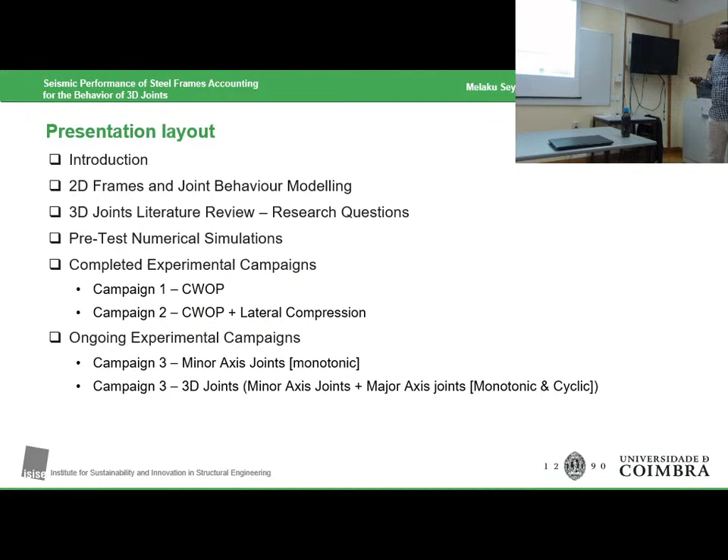My presentation has the following layout. I'll first give some introduction, followed by the basic work done in two-dimensional frames and a literature review that was done to provide the research questions, which will be presented later. The pretest numerical simulations will be shortly presented afterwards, and then I'll present the results of the completed experimental tests and show you what is being done currently in the last few slides.

The scope and objective of this work is mainly, the end goal, to study the major and minor joint interactions in three-dimensional joints where beams frame into a column from both the major axis and the minor axis direction, and propose an appropriate modeling technique for structural analysis and assess the joint model's effects in design and seismic performance. To do this, experimental tests will be carried out, a modeling tool will be developed.

Then analysis and design routines will be developed, and the performance of the frames will be assessed using nonlinear analysis. The scope of this work is, for now, applicable to the type of joint typologies we studied, but probably scalable, and this is to be determined.

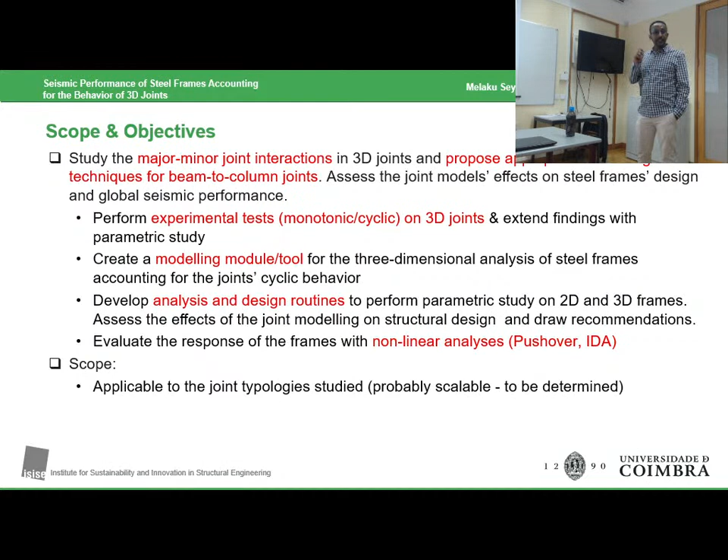This is the research structure and the tasks. The ones in red are completed tasks. The ongoing ones are in purple or pink, and the white ones are the ones yet to be completed.

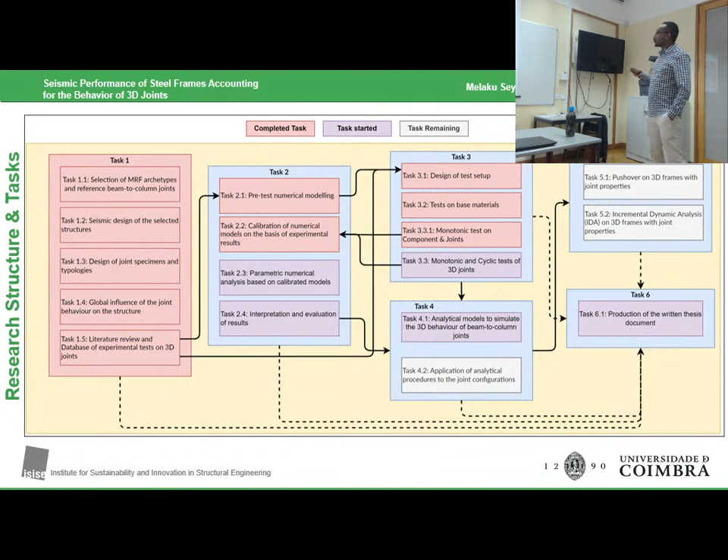It starts with task 1, where we work on 2D and then the literature review on three-dimensional joints. Task 2 is the numerical modeling part. Task 3 is the experimental part. Task 4 is the analytical mechanical development part. Task 5 is the nonlinear performance assessment. Task 6 is writing the thesis itself.

To give an overall idea for people here who are not working in the area of joints, the joint behavior can be predicted through several ways, using analytical, empirical, experimental, mechanical, numerical, and nowadays informational models. The joint can be represented in structural analysis using different methods of different degrees of accuracy, such as a linear model, bilinear model, multilinear model, or a complete nonlinear model.

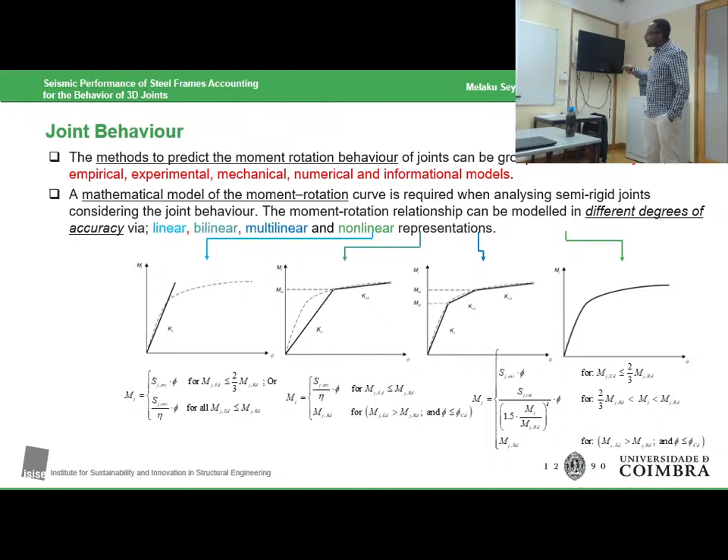Apart from the behavior, the way we include the joint in our model is also important. The most common is this one, where we use a linear center line model, where the node dimension is completely disregarded, and the joint's behavior is completely taken as fixed or continuous.

Then you have a bit more refined option, where you still have a center line model for the beams and columns as bar elements, and at the ends, springs could be put to represent the behavior of the joint. Another even more refined model would be the scissors model, which considers the dimension of the web panel zone, but only considering it to be rigid, expressed by a spring that defines the rotation between these two vertical and horizontal elements.

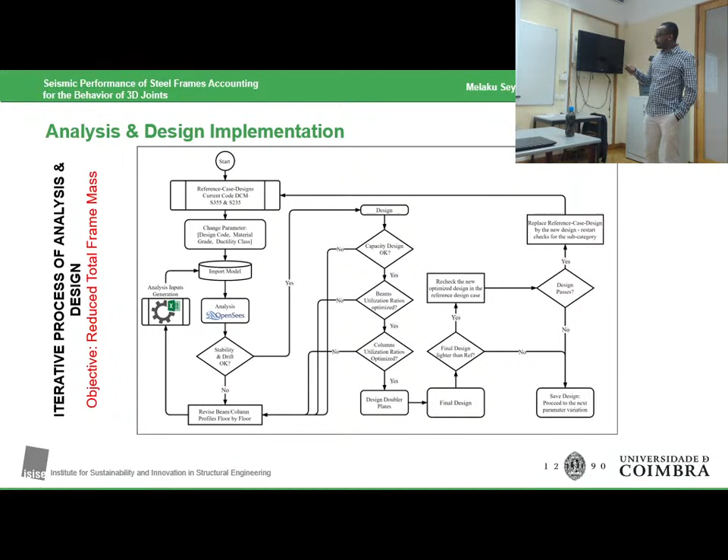So the inputs are simple, given like this in Excel, here defining the geometry, here defining the load. From this, the program would generate the nodes, the elements, the connection stiffness, and so on, using the joints given by the EQUALJOINTS project. Here, analysis types are defined, and here, if needed, the individual member sections could be changed after generating.

With this, a parametric study was carried out, where about 96 frames were studied, with regular and irregular spans between the frames, between bay and bay, considering 3, 6, and 9-story frames, all at the same location, with peak ground acceleration of 0.35g, on soil type B, considering the current and the revised ductility classes, using 2 material grades, and considering 2 approaches for the joint model.

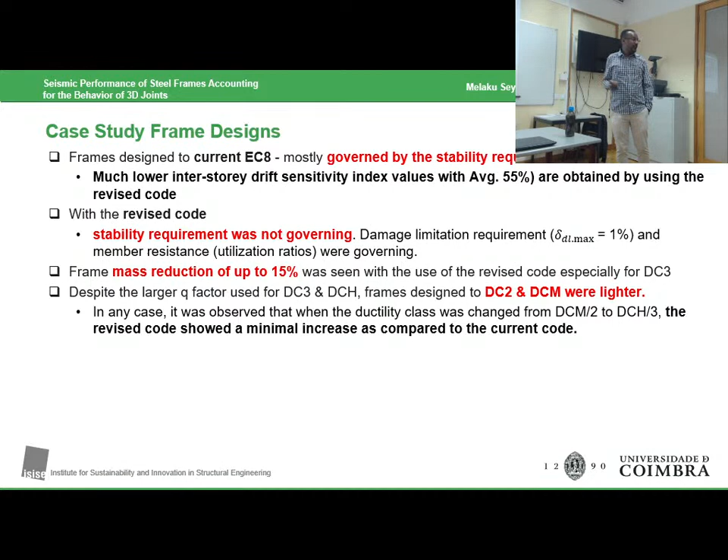The performance of these frames was assessed using nonlinear analysis, using a trilinear model to model the web panel's shear behavior, and the interface between the beam and the column was modeled using the IMK model. Nonlinear static and dynamic analysis were carried out.

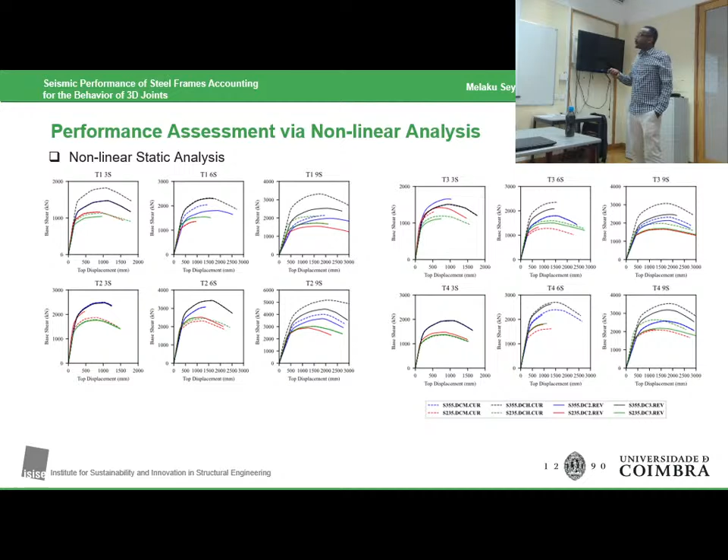The results of the pushover analysis are these. You see the base shear against the top displacement here. To save time, I'll skip faster because I'm left with short time. The behavior factors were estimated from these results.

As you can see here, considering the simplified model, you get bigger, larger behavior factors than when you consider the refined model. Frames designed to the revised code had smaller lateral stiffness, as you can see. The broken line is the current code and the solid lines are the revised code.

However, it was noted that the overstrength component has a significant role. The factor given by the revised code, which accounts for every other source of overstrength, equal to 1.5, was considered risky, at least in the assessment phase, because all the values were higher than that in our computations.

Here, the behavior factor for redundancy, the behavior factor for ductility, and the behavior factor for overstrength are shown. If you were to use these two only, or multiply them by a constant as suggested by the current revised code, you would be implying, for instance, that frames designed using S235 material would have higher behavior factors than those designed for S355. However, when inputting the exact values of the overstrength behavior factors calculated for each, the difference between these two narrows.

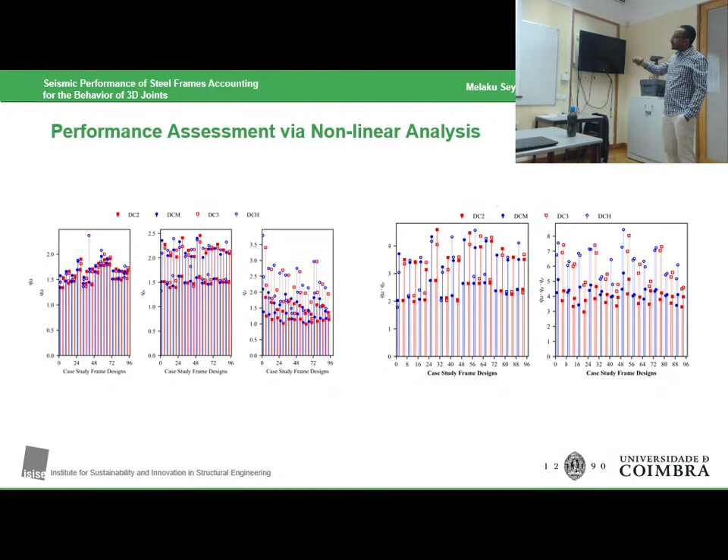The same can be said about the ductility classes. When using a constant value to multiply, you would get more or less the same value, without a significant difference between these two. On the other hand, when applying the raw overstrength behavior factor value, you'd see the difference between ductility class medium and high, ductility class 2 and 3.

So the ones used in design are these, 6.5 and 4 here. Using this value, or multiplying it by a constant, would give you behavior factors that are equal for all cases, but when considering a particular behavior factor for each case, you can see clearly the difference in the behavior factor for the elements.

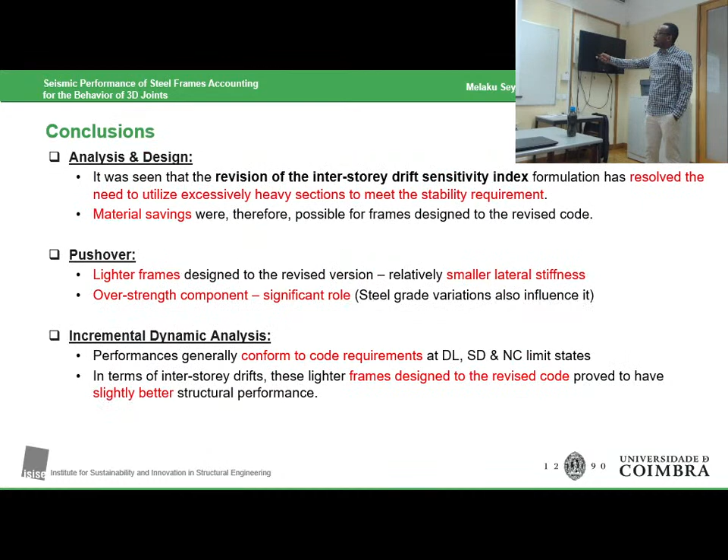The IDA gave reasonable results for all, so I won't delve into this further. I have discussed the results in detail, so I will not summarize here.

So now let's go to the second part, which involves the literature review, moving now from 2D to 3D, to see what is available in the literature.

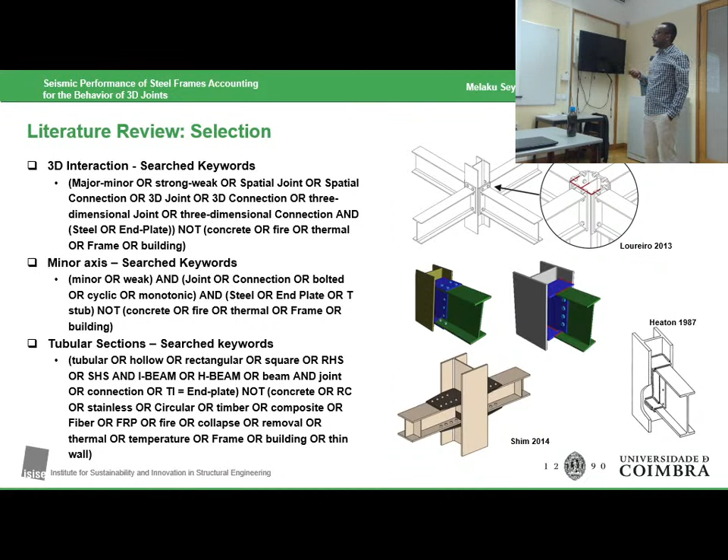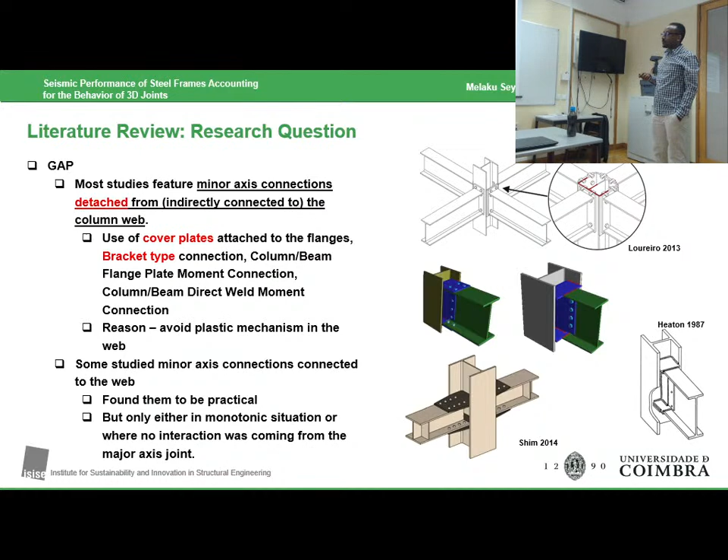These were part of the searched keywords, and the gaps found were that most studies studied minor axis connections that are detached from the web, or indirectly connected to the web using cover plates or bracket-type connections, as you can see here.

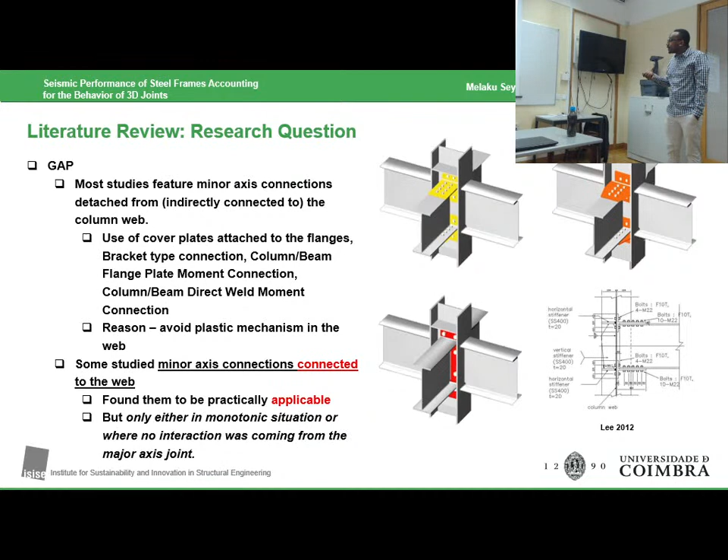But some other studies were using connections directly connected to the web, and they found them to be practical or applicable. However, these studies were made only either in monotonic situations or where there was no interaction coming from the major axis direction. So this was the gap.

After seeing this, the research question became: where are we now? How accurately can we estimate the behavior of the column web under out-of-plane loading? To what extent can we use these types of connections in seismic regions—low, medium, or high seismicity—or not?

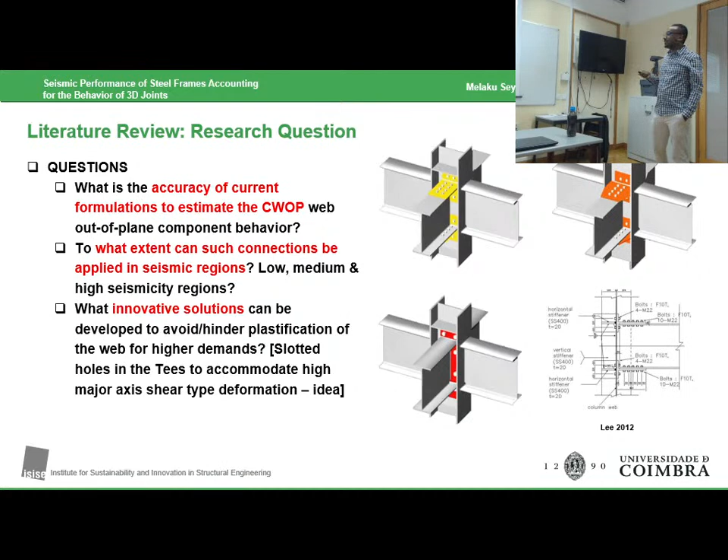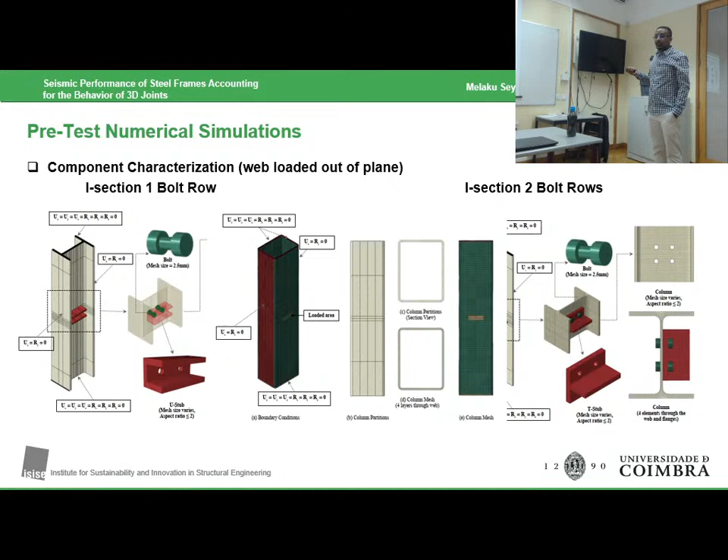And what innovative solutions can be proposed to avoid plastification in the web, or at least hinder it? With this, we went into pre-test numerical simulations, where about 45 models were developed to check the behavior of the column web under out-of-plane loading, with 1 bolt row and 2 bolt rows, and also considering a thin plate connection or welded connection for tubular sections.

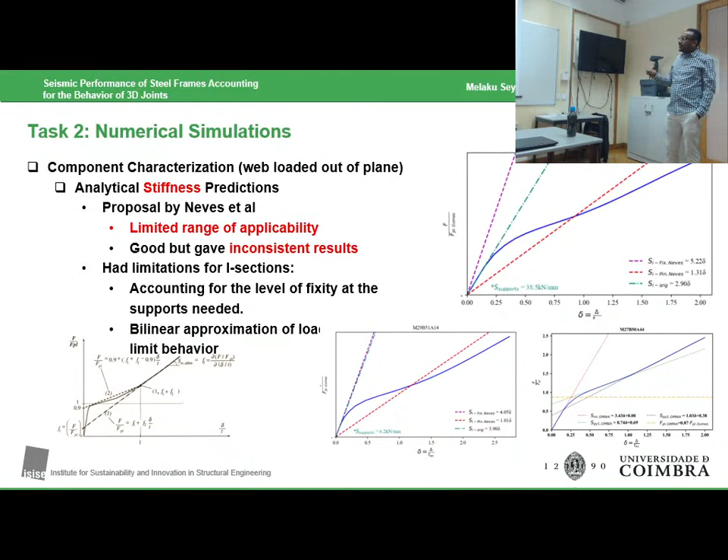So some of the proposals have limited application and were giving inconsistent results. For instance, here it's working fine—the Neves model. However, in this case, the Neves model was not working fine. They have their own limitations.

Knowing this, we went into designing an experimental campaign. So for experimental campaign one, the test setup is shown here, where we wanted to study the component, which is a column web loaded out of plane.

These are the specimens. Most of the action was on the back side of this image, so many of you did not know what was happening from the windows or from the lab. We were pulling this specimen out of plane using connectors that were designed such that they could be used repeatedly with different bolt hole patterns.

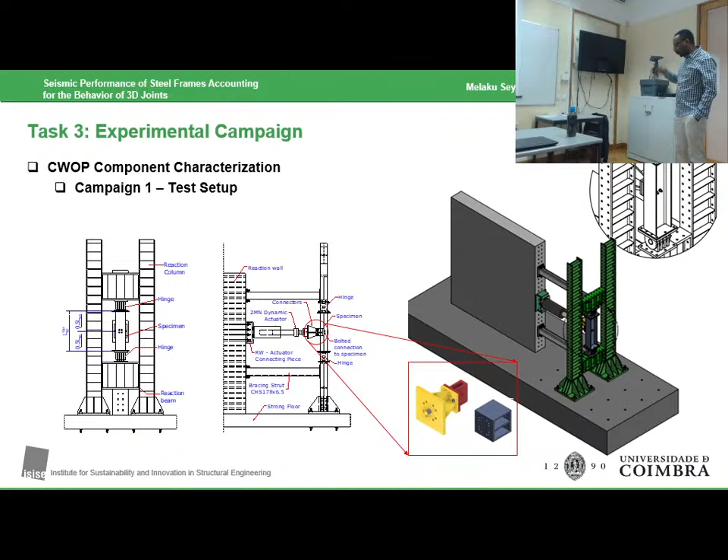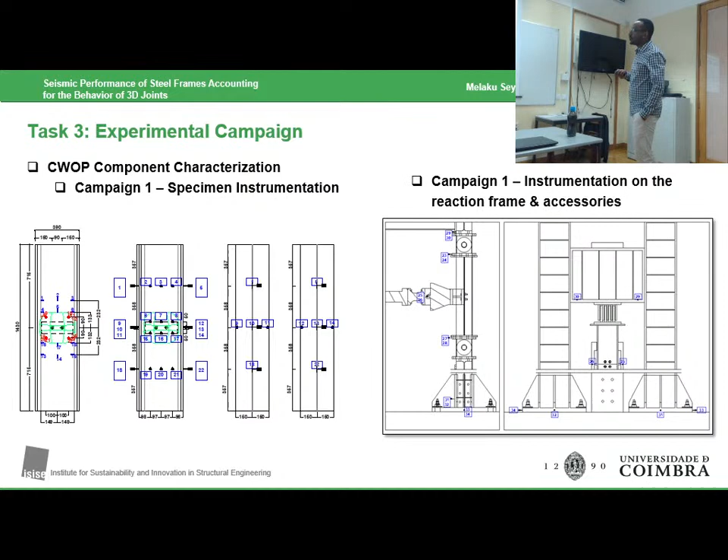Five specimens of different lengths, web slenderness, and different bolt arrangements were tested, and digital image correlation was used to track how the web behaved as the loading was applied. This is the instrumentation used. The location of the strain gauges and LVDTs were decided using the results of the pre-test numerical analysis.

The material properties were tested and numerically simulated, and the inputs for the finite element models used the actual material models that go from plastification until fracture. You can see here that we went into a fracture model.

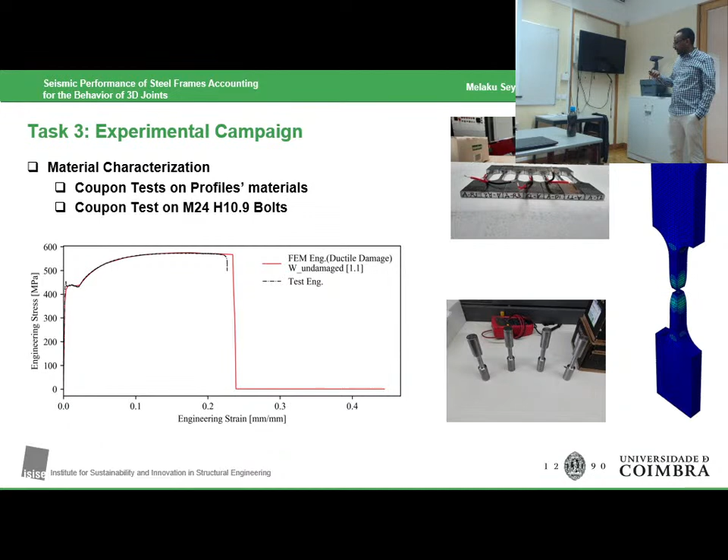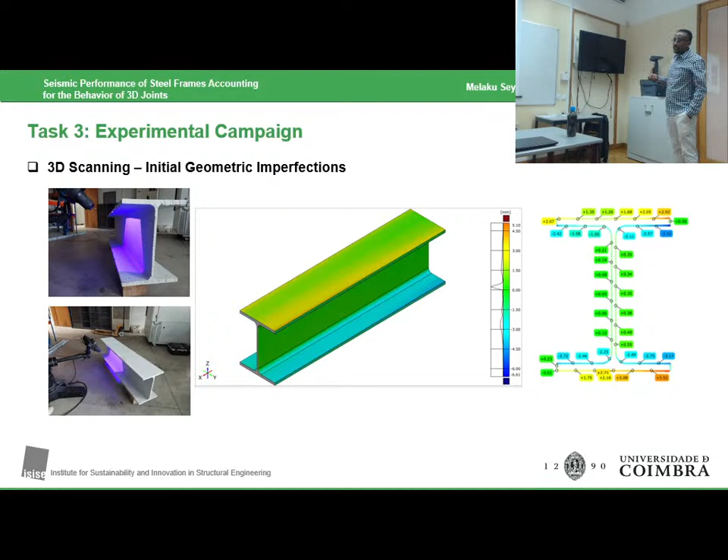Scanning was done to find the initial geometric imperfections. As the members were short, it was not the member-type imperfection that was mostly governing—it was the geometric imperfections along the cross-sectional imperfections.

Numerical models were devised and developed. I will not go into the details of the modeling, but I will show you here the results of the numerical models, in red, and the results of the tests, in black, for the two tests, because these results are not published yet. I will not be presenting the rest of the results, but you can see that there is good agreement between these results.

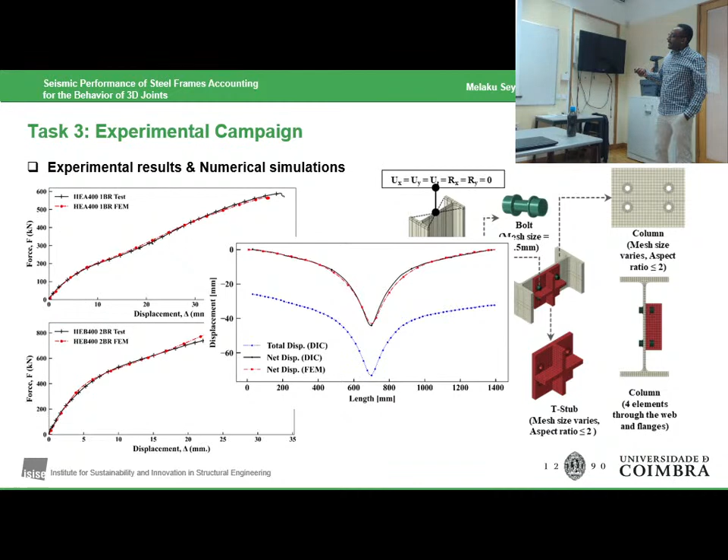In addition to the force displacement curve, a cut was made, as I showed you earlier, along this line, from the digital image correlation results, and compared against the results of the finite element analysis. You can see that there is an excellent match between these two.

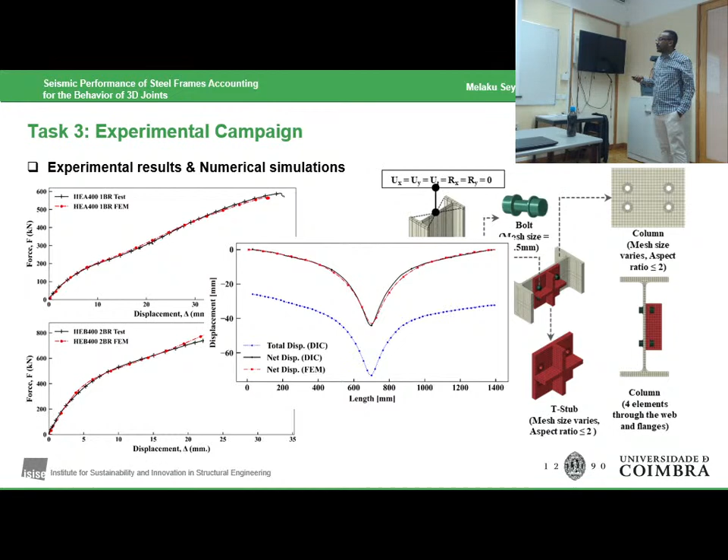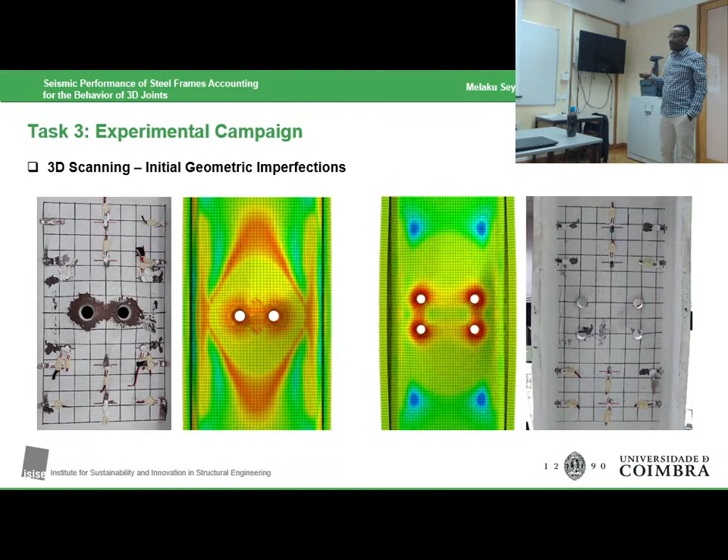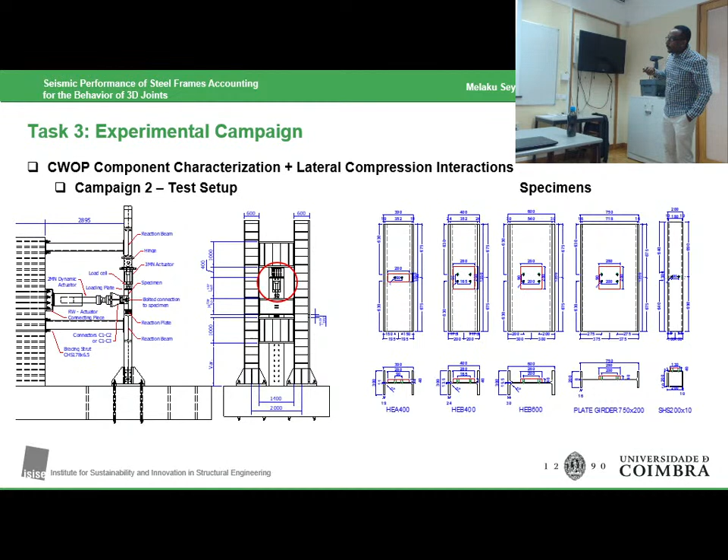Campaign two now involves not just the component under out-of-plane tension, but also under lateral compression, because part of this study involves understanding the interaction between several forces at the web panel zone. So the same specimen was rotated and kept here, but the difference is that now we have axial lateral compression coming from the other side, on top of the web panel being in tension.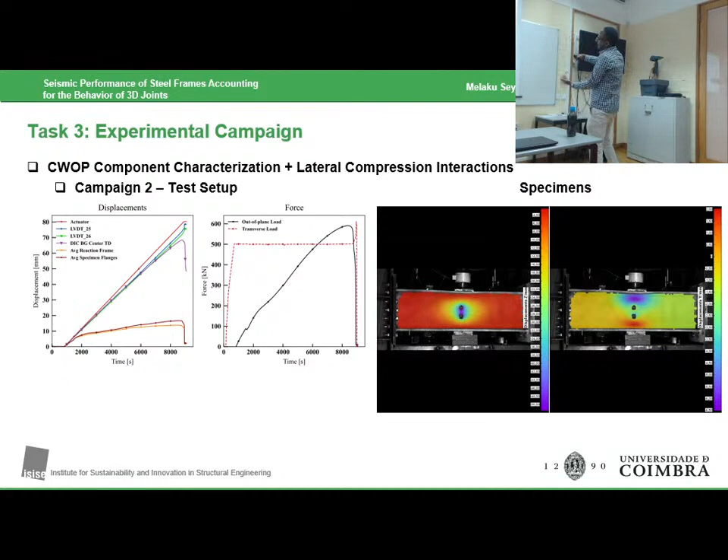Load was applied laterally and then maintained constant while the load was gradually increased out of plane from the web. These are the results from digital image correlation again. This is the displacement out of plane, and this is the displacement due to the vertical load in the vertical direction.

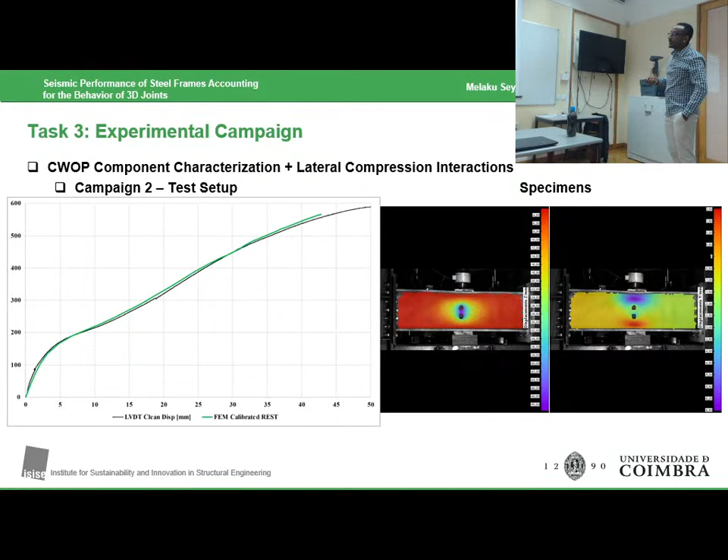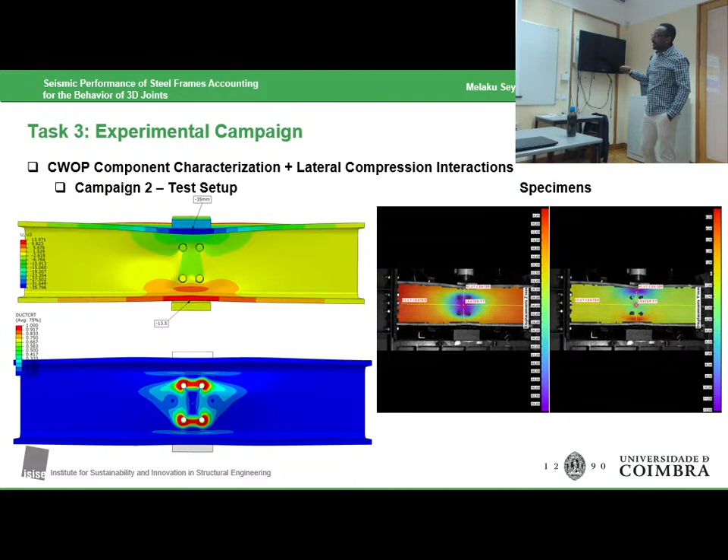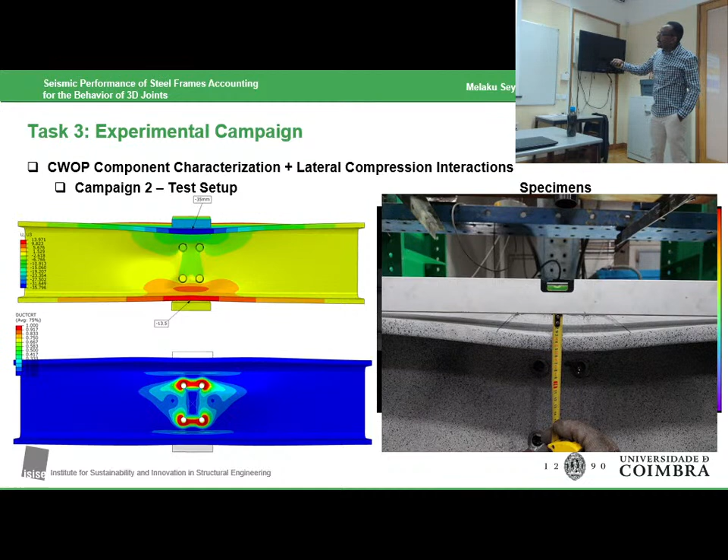These are the force displacement plots, and again there is a good match in the results between the finite element model and the test. The finite element model modeled the top plate and the bottom plate used as bearing plates to apply the loads, and the deformed shapes are matching. The displacement measured in the test was about 3.2 centimeters, and the model gave about 35 millimeters, showing good accuracy in the numerical models.

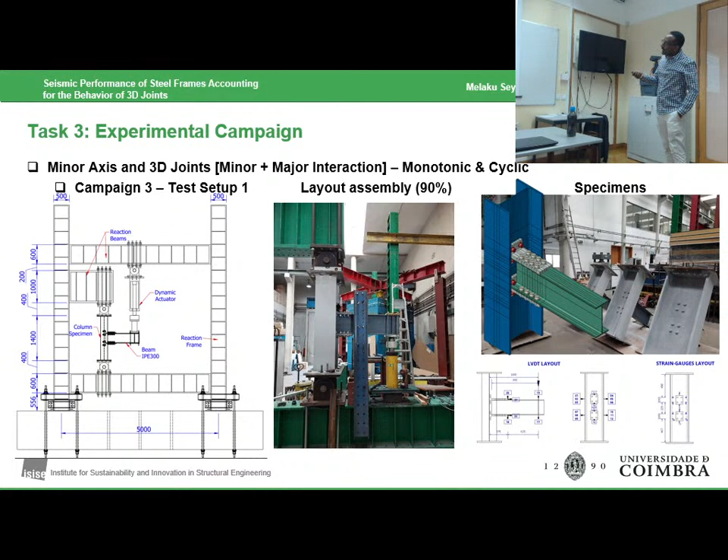Right now we're in campaign 3, where we are studying joints rather than components, applying load onto a beam and studying the behavior of the column web panel. A second setup will involve the same thing, but now with an additional beam connected to the column in the major axis direction as well, so minor axis plus a beam in the major axis. One will be put under monotonic constant load, and the other cyclic and reversed in both directions.

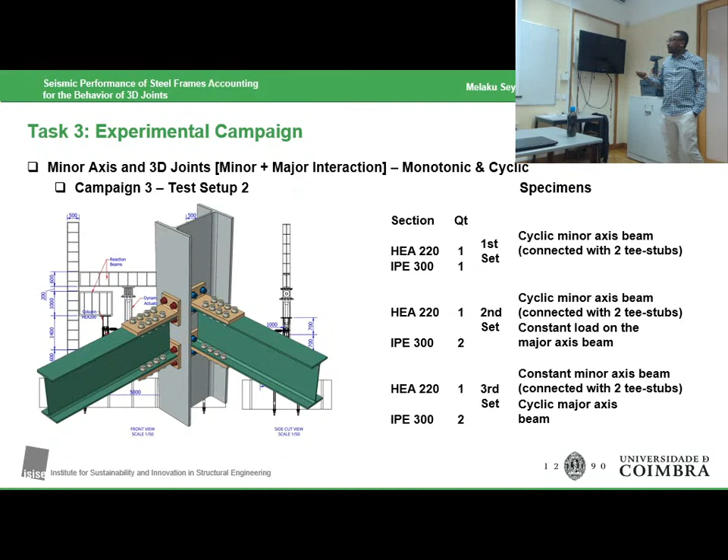Considering the laboratory equipment we have here, the initial plan was to apply bi-directional cyclic loading, but we found this would be a faster way to do it.

I would like to thank my supervisors and the visiting researcher with us, Jorge, who accompanied parts of the tests, and honestly the lab personnel here, without whose help this work would not have reached this far, because they helped a lot with the experimental part.

And I thank you all for your attention. I finish it. Obrigado.

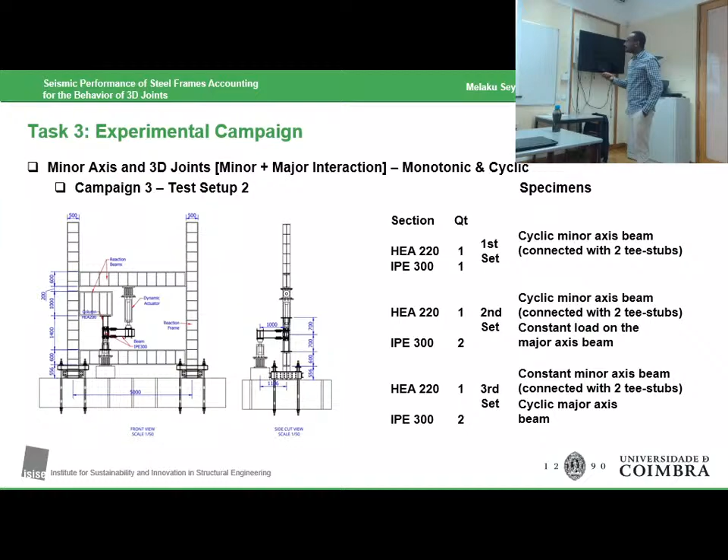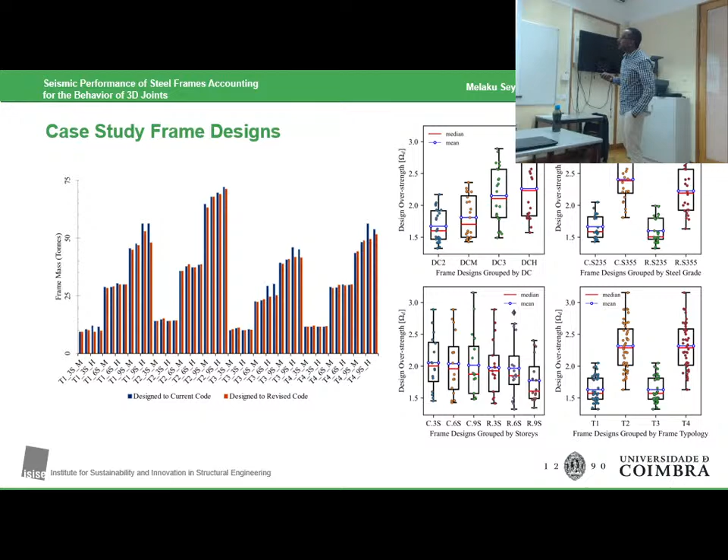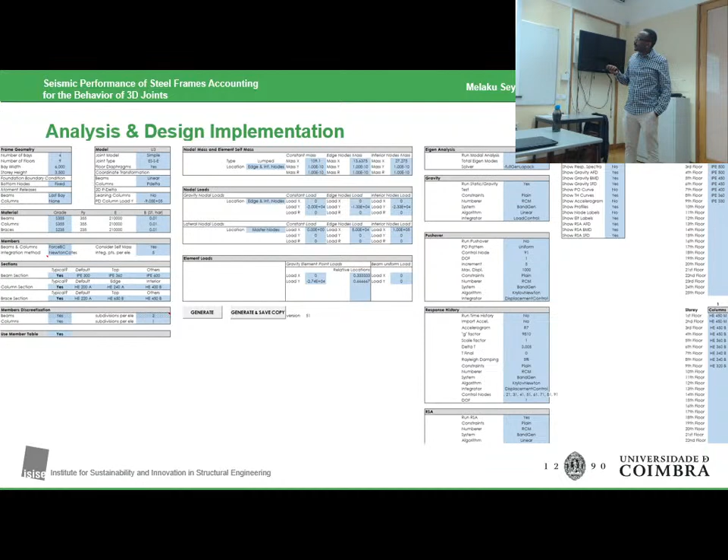In this design tool, there was the option to model any of these joint types. You may not see it here, but this is a joint model. Here it was used for design, a simple one, but any of these could be modeled with the tool. The thing is, as we found this model to be the most detailed and closer to reality, in assessments the model used was this one. In design, I used the simplified model, plus these models. But it was indicated in another paper we published that using this is a little trickier, because we are putting more springs at the same location, and it would be prone to numerical instability a lot of times. This one was found to be giving good results.

Also, since you asked where this could be applied - for instance in the EQUALJOINTS project, the behavior of the joints could be different. You could have a balanced web panel, a weak web panel, or a strong web panel. Where you have a strong web panel, this model is fine, using rigid elements to represent the web panel. But when you have weak and balanced web panels, using the Krawinkler model would be the most appropriate.

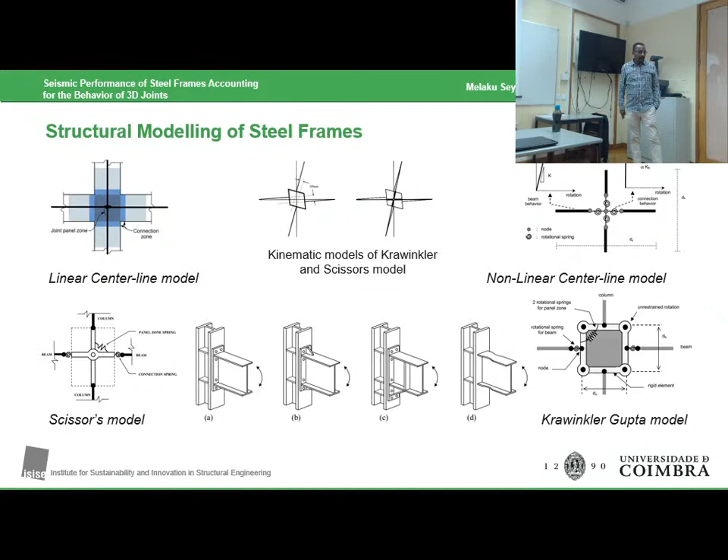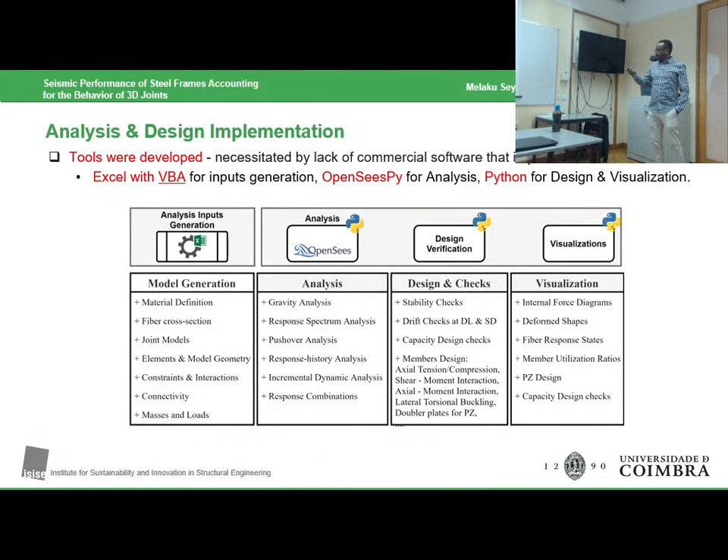Previously these two behavior factors were defined: a value of 4 for ductility class medium, and a value of 6.5 for ductility class high. The alpha u by alpha 1 ratio was given as 1.3 for non-sway frames. For ductility class high in particular, it was relaxed a bit more than ductility class medium - you can see here we are given a smaller behavior factor, which means the structure will take more load.

But the design actions calculated for each member are not as they were in the current code, because previously you would amplify the shear, axial force, and bending moments with this factor, but in the revised code you would only amplify the axial forces. In the end, with this change and also the change in the inter-storey drift coefficient, you would attain lighter solutions - so comparing to the current code, less mass of steel would be required to achieve the same result.

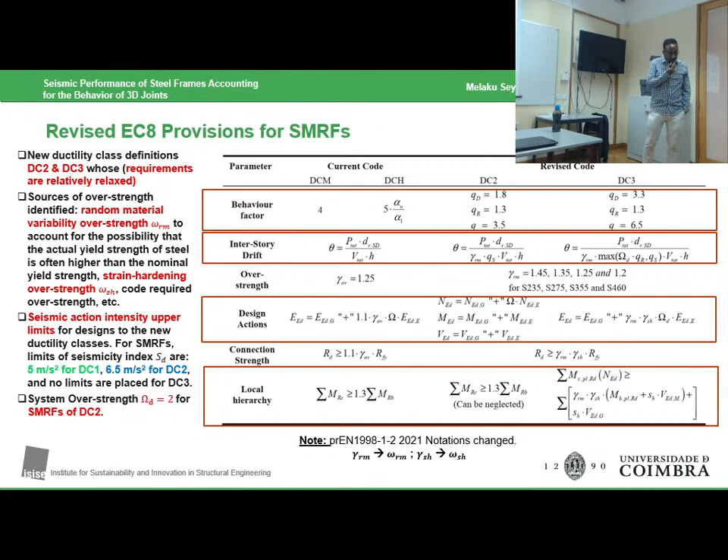Okay, so regarding that answer, on slide 17, also regarding the behavior coefficient.

Yes. So you also presented, I think it was after, some results from the comparison between different grades and different coefficients.

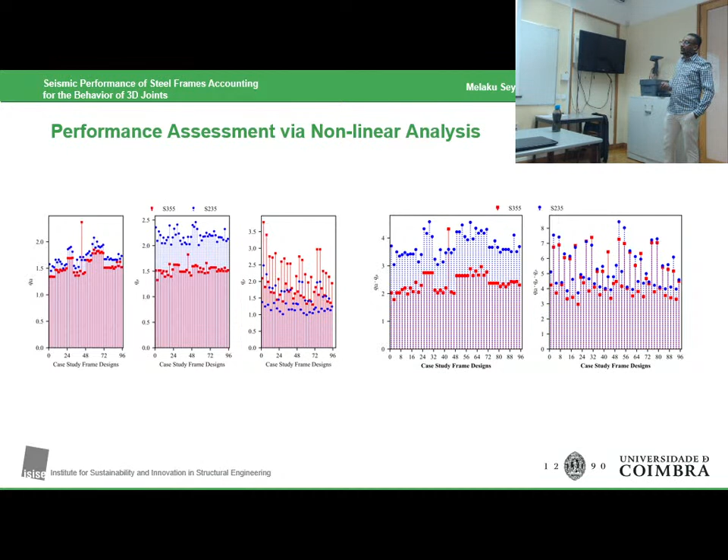Yes, okay, I can explain it. Look, the new code, as I said, gave the total behavior factor as a product of these individual behavior factors that represent ductility, redundancy, and all other sources. All other sources within itself holds the behavior factor for overstrength at least. And they gave the behavior factor for overstrength and all other sources as a constant, which was a value of 1.5.

But as you see here, the behavior factor for the redundancy part, which was calculated after the full performance assessment, you'd see that S235 is not so high, but closer, still higher than that of the S355. Likewise, for ductility, S235 would have a higher behavior factor than S355. If we were to take this and multiply it by the constant behavior factor for overstrength provided by the code in assessment, you would get a value for S235 higher than S355, which in reality is not the case, because when you consider the behavior factor for overstrength actually calculated from the frames, the difference between these two narrows to, I don't remember the exact number, but you can read it in my paper. It's not as big as this you can see here from this plot.

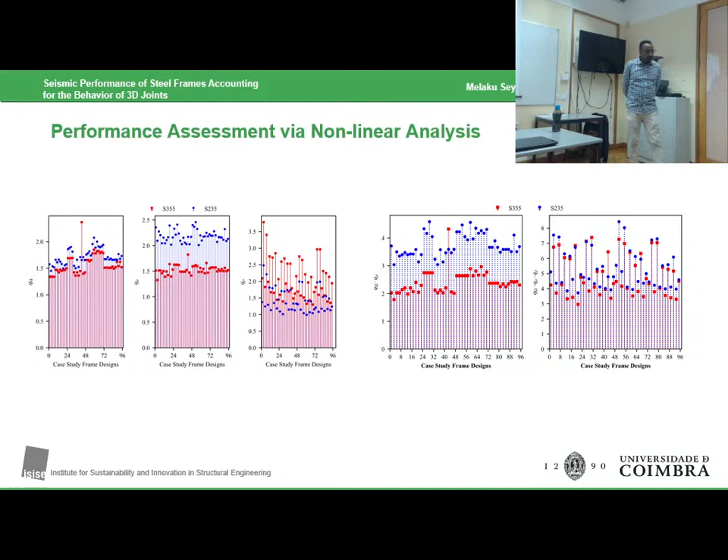Okay, it's a good question. Like everything in life, we're restrained by resources. I could not test all the sections that are available. These sections were sections available here at the lab, and we made a choice in varying them, because we're studying the column web, by varying the web slenderness ratio mainly.

And then, from within that, we wanted to make the most out of it by finding representative sections: here is an HEA 400, here is an HEB 400, you have an HEB 600, you have a plate girder here, which at times is high strength fully, at times hybrid with normal conventional steel in the web and high strength steel in the flanges, and also tubular sections. So we tried to vary it as much as possible to obtain the most possible outcome from the materials that we have.

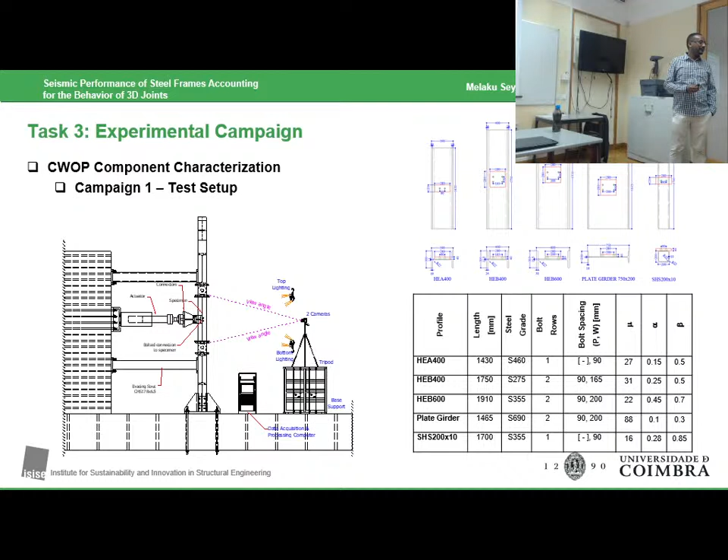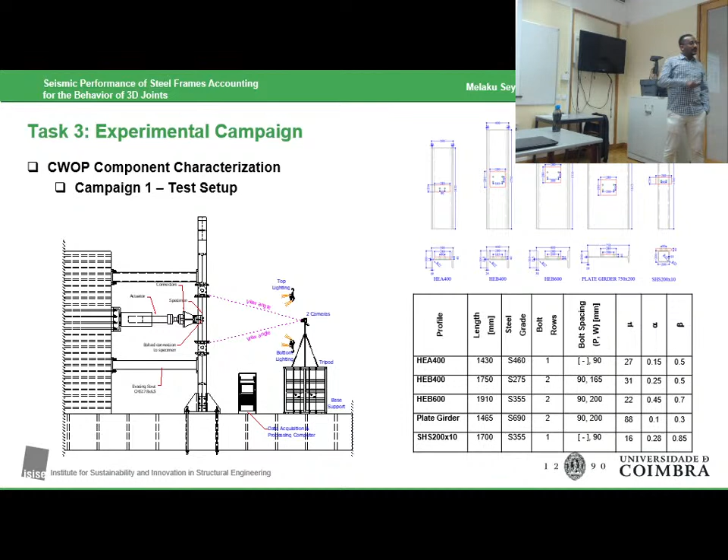My question has two sides. One is about when you introduce material behavior for the springs, did you consider any degradation in strength, stiffness, and related things? The other side is about how the degradation relates to the behavior factor R or Q, which you said has three different parameters. Did you consider those at the same level, since degradation in the yielding zones or plastic hinge has important effects? How did you consider this in the software, in terms of frequencies and the rest?

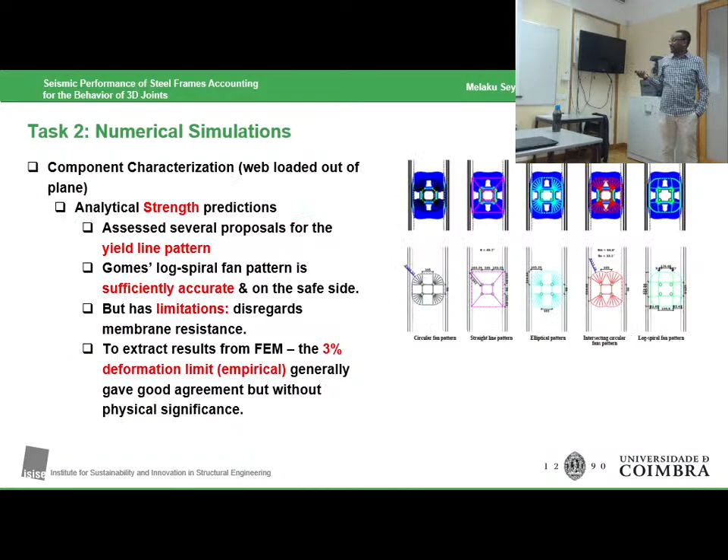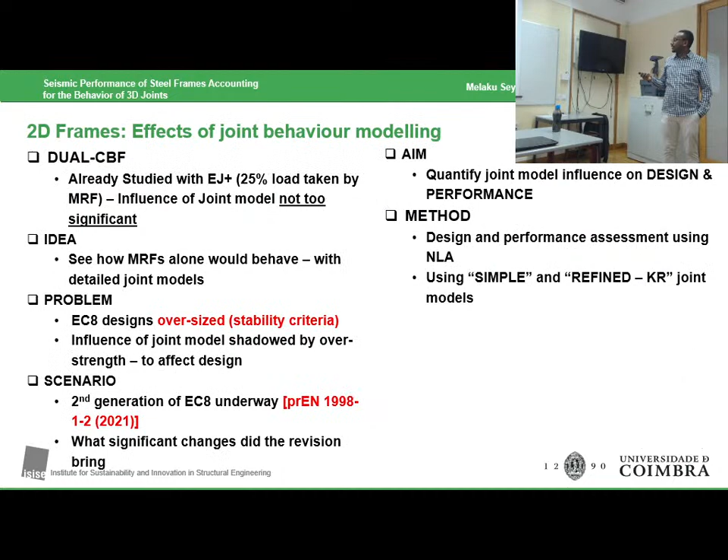Good questions. First, about the implementation of the Krawinkler model in my analysis, let me explain. For the panel zone, this trilinear curve was used without any degradation. However, the interface between the beam, the connection, and the joint was modeled using the IMK deterioration model, which includes deterioration in stiffness and strength. These were calibrated based on test results obtained from the project and input using the modified IMK.

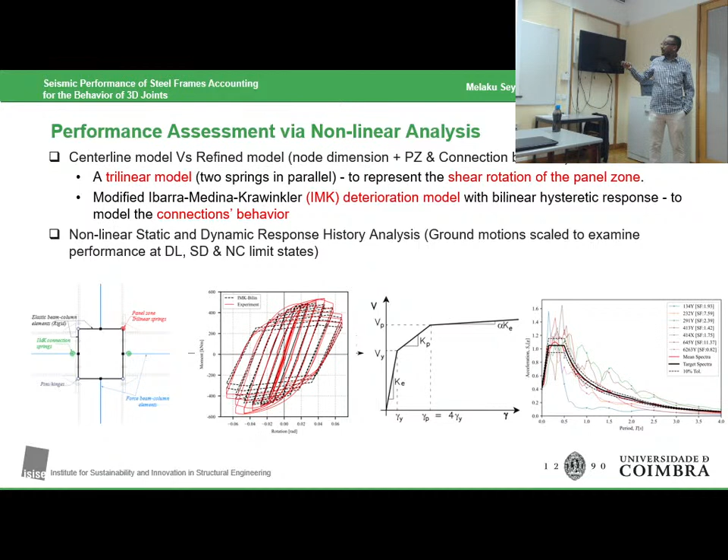Second, you're asking at what point I used them. They were taken at the same point. You have to define a point where you consider the ultimate limit state has been reached, though I didn't plot the curves here. The ultimate limit state was considered reached when the interstory drift exceeded 4%. So for all of them, the ultimate state was the point where interstory drift exceeded 4%.

So they don't lie at the same point because the trending is different, but a constant value parameter was used to determine those values, since this factor, delta U over delta Y, will differ between cases because the base shear at the idealized yielding point changes. It's different between cases, but it is not affected by the ultimate point. The ductility component of the behavior factor, affected by the displacement at the ultimate limit state, is related to that point. A constant value of 4% interstory drift was used.